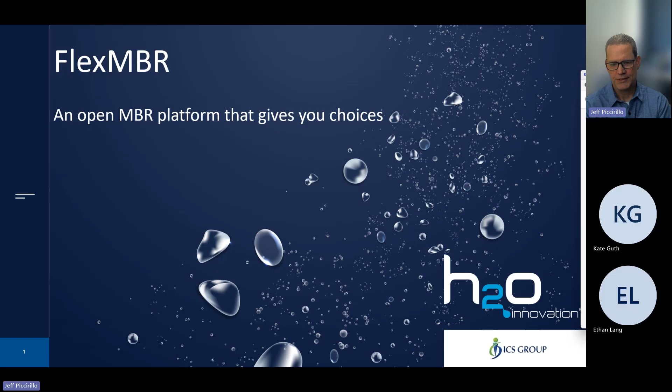It's always good to get out and share our knowledge and a little bit about H2O. The presentation I put together gives a high level overview of H2O in case you're not aware of who we are. Then it'll dive into our MBR application, FlexMBR, and finish up with a case study of a retrofit that highlights the different attributes and how you go about incorporating FlexMBR into a retrofit, a greenfield, or an expansion application.

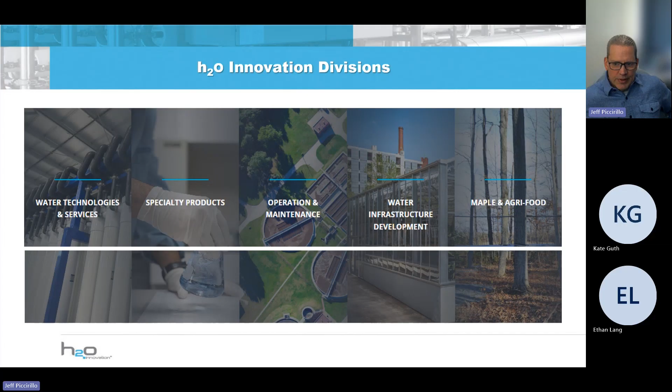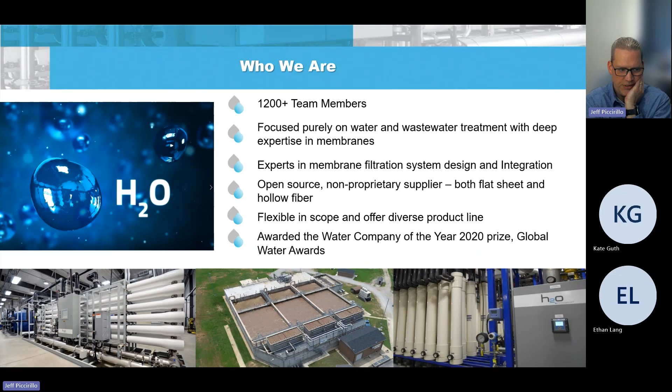At a snapshot high level, we're over 1,200 team members. We focus purely on water and wastewater treatment, that's it, and we have very deep expertise in membranes. Every single one of us in this organization has been around membranes for, I'd say, 3/4 of our careers. We engineer, manufacture, service, and operate water, wastewater, and water reuse systems. Through our expertise in membranes, we promote a flexible approach and want to provide freedom of choice to the end user, enhancing performance and reducing overall operating cost.

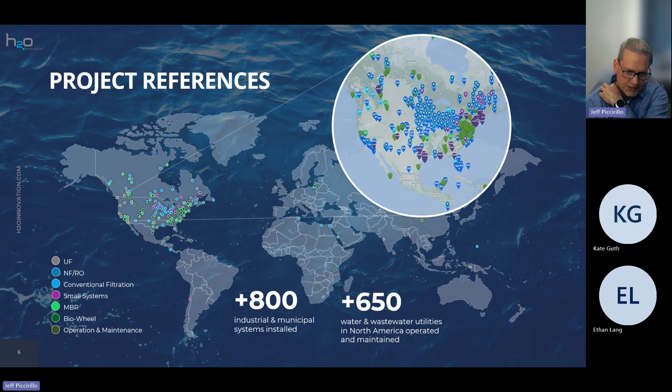In terms of projects, we're pretty broad across North America. We have over 800 industrial and municipal systems, including UF, NF, RO, MBRs, some small systems, and we operate over 650 water and wastewater utilities. We take that O&M experience and apply it into a lot of our technologies and designs as we look at water and wastewater plants.

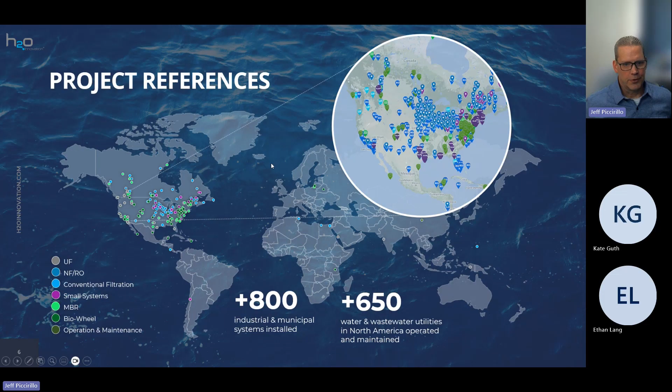We are also an OEM. We have 2 manufacturing facilities, over 100,000 square feet of manufacturing. We have a facility just outside of Minneapolis, and another facility in Quebec, so we can cover Canada and the US quite extensively. We also have chemical mixing and manufacturing in Vista, California.

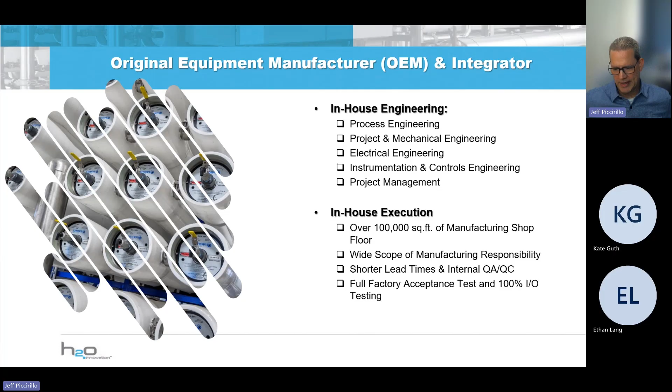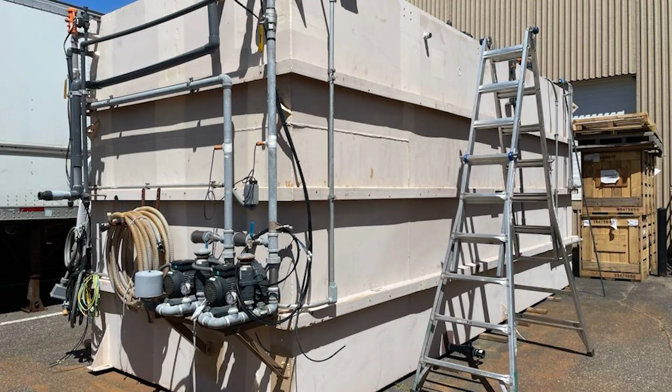And we have full-blown engineering in-house: process, project, mechanical, electrical. We do all the instrumentation and controls, plus full project management and execution. Having that in-house ability means we build all our skids from the ground up, giving us a firm basis to test and check them out before they ship to the site, which helps save time on site.

All right, so that's the overview of H2O. I sped through that, but now I'll move into the MBR portion. I wanted to start by going through the key applications we look at for MBR, which I've categorized into three categories.

First is stringent effluent limits. With MBR, you have the capability of getting exceptional water quality because it is a UF membrane in the end, it is a barrier. So when folks are looking to get BOD and TSS less than 5, trying to get nitrogen less than 10, and total phosphorus less than 0.3, MBR is a good option for that.

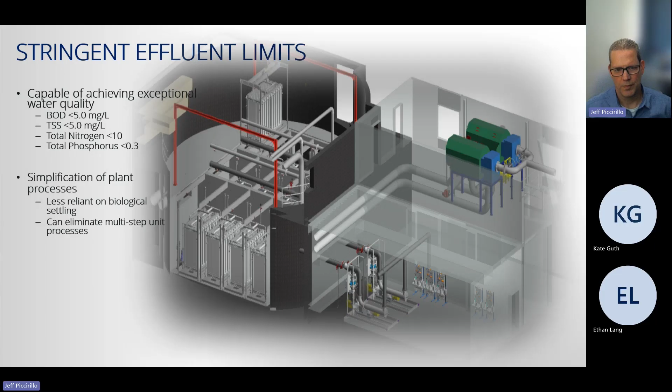Also, simplification of the plant process, so it's a little less reliant on biological settling and can eliminate a lot of those multi-steps in the unit process. You can eliminate, whether it's an additional clarifier, you may have a disc filter that's doing some polishing in the end.

There may be a slightly higher capital cost on the MBR portion, but generally you're eliminating steps in a traditional conventional wastewater plant. The other factor we look at is if a plant's looking to increase capacity. You can get a much more compact footprint with MBRs, double, maybe triple the capacity of a conventional activated sludge facility. And it's also very adaptable to retrofit into an existing treatment plant, whether you're trying to expand the plant life, extra capacity, or hit new treatment goals.

We'll touch about that in the case study. This is actually a picture of the case study we'll be touching here at the end.

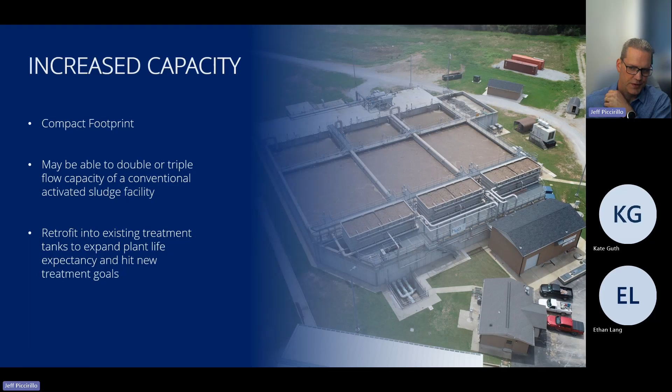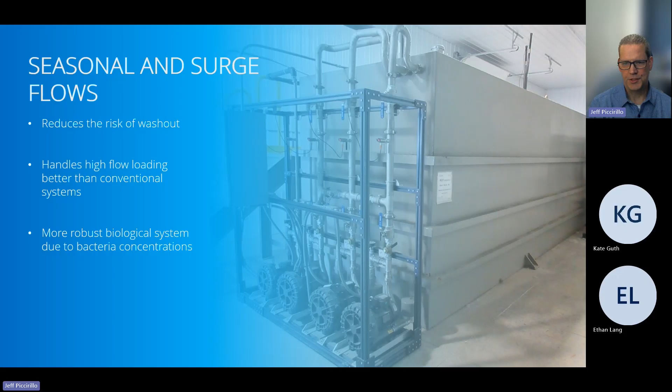When you have seasonal and variable flows, or surge flows, because MBR is a barrier, you are running at higher mixed liquor concentrations than you would with a traditional system. You're able to handle certain high flow loading better than a conventional system. Tends to be a little more robust on the biological side. You can build a portion of that equalization into your bioreactor because you are running at that higher mixed liquor concentration. And because it is a membrane, you can run temporary flux increases that handle some of those short-term surges that a plant may see, and run the flux a bit because you're able to clean them back, get them back to a condition where you can run that MBR at a nice steady state.

So we want to dive into the FlexMBR platform that we've developed our MBRs for. First, a little bit of history.

In a nutshell, MBRs have kind of gone through what we would consider 3 membrane lifetimes. When MBRs first came out, it was 3 products: Zenon, Siemens, and Kubota were the three main players. That has now since grown to over 30 different products and continues to grow as MBR took foothold and got adapted more and more within the market. And that brought obviously increased competition, technology matured, it improved, really new products that have been developed, positioned for that retrofit market, those first membrane lifetimes where those first membrane systems were installed.

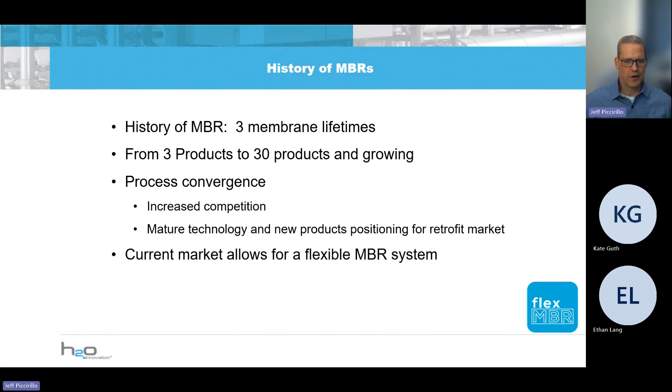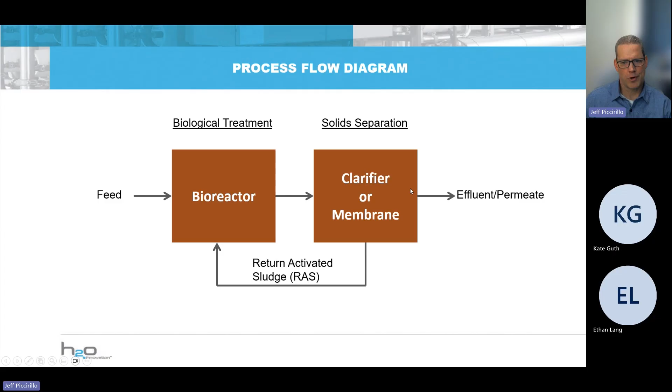So based on that, we feel the current market allows for a flexible MBR system. And to kind of talk about what we mean by that, we'll just start real basically. In a biological treatment system, you have your bioreactor, your biological treatment, and then you have your solid separation. The feed coming in, you'll have your return activated sludge, and then you have your effluent or permeate going out. So that solid separation typically is a clarifier, some sort of sedimentation, or it could be a membrane.

So from an MBR process, we're going to focus on that solid separation. The reality is you have that membrane filter you drop in within your tank, and you have your activated sludge from the bioreactor coming in, you have your return activated sludge coming out and going back to that bioreactor. And the membrane, you pull a vacuum on it, and the permeate comes out, and you're concentrating that sludge within the tank.

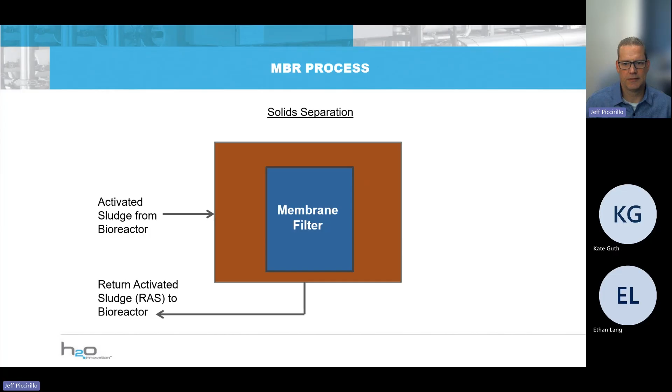So with that factor, on a membrane system, you're going to have a permeate line coming off. As I mentioned, there's a vacuum, and then you're going to have an air supply coming in. That's supplying air scour for that membrane to keep the solids from building out, impacting it to kind of an irreversible fouling or flux condition.

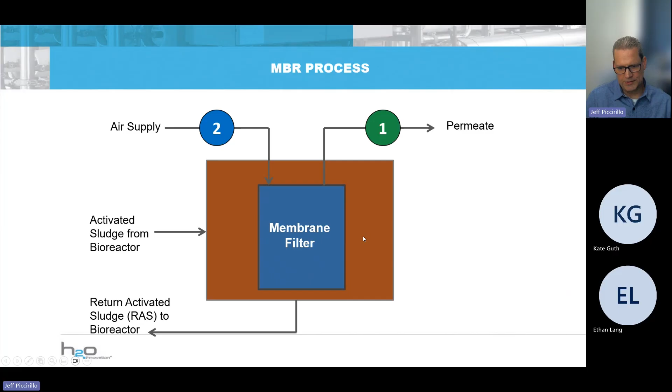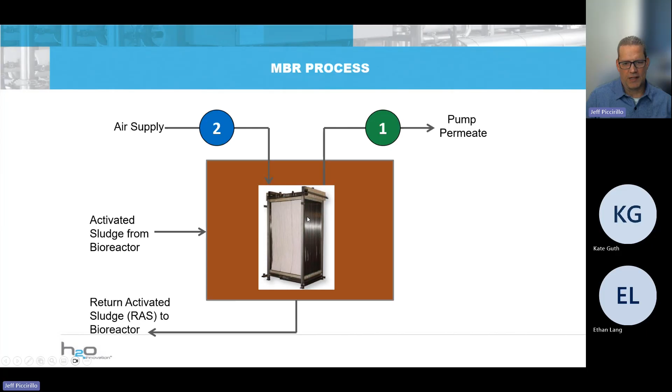And with that, really, it's that membrane filter. Traditionally, has always gone to a membrane supplier, and they design around their system, around their membrane. But the reality is, there's enough systems out there, and in our expertise, we found that really your permeate, your air supply, how they run those and set those can fall within a common band. So that allows you to maintain these conditions and provide flexibility in that pump, the air supply. That gives you that flexibility to drop in a different membrane, whether it's hollow fiber or a flat sheet.

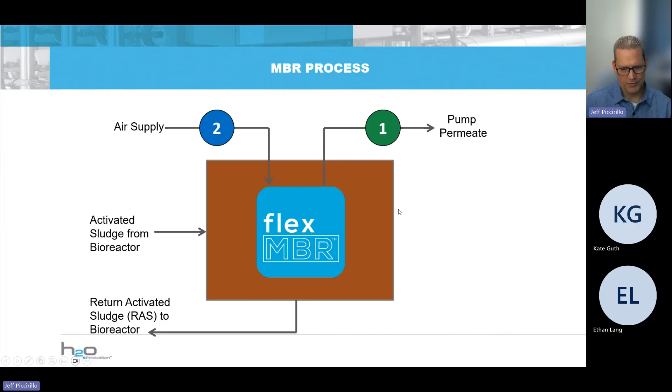Or even ceramic type applications. So that's our concept at a high level. It's simplified from what a flex MBR is. It gives you that flexibility to use a wide variety of different types of membranes.

So with that, and this whole product convergence of a wide variety of manufacturers, when we're looking at a flex MBR design, really the considerations we're looking at are the air scour rate, the mixed liquor concentration, what kind of process sequence is coming in, and then obviously there's module dimensions. Every module's got a little bit different dimensions, and how do you make that fit in so you can adapt to keep that flexibility?

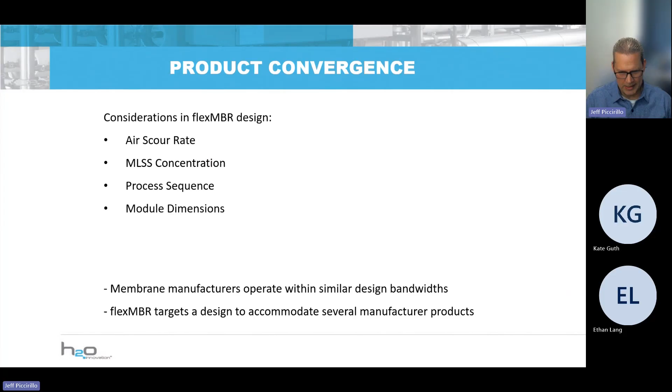What we found out is that membrane manufacturers operate within similar bandwidths. Because of that, we can target, design, and accommodate several different manufacturers through our experience and knowledge, and that really comes into the heartbeat and programming of our systems. If you look at air scour, for instance, we can find a band where we can get the aeration module sized, size a blower for that, add a VFD, and provide the programming and knowledge behind that to accommodate a wide variety of different manufacturers.

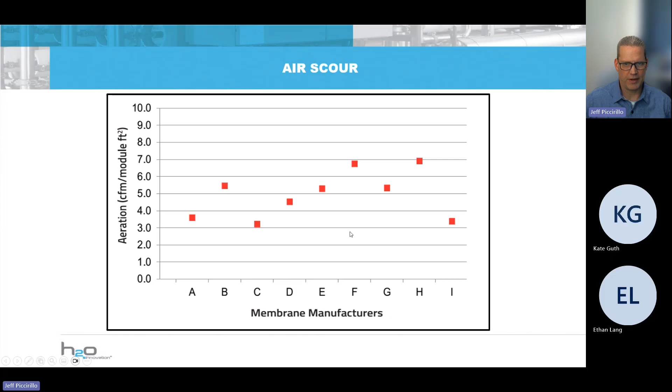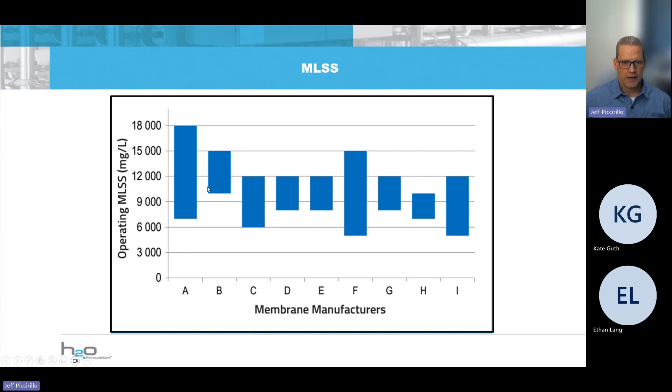Same thing in the mixed liquor. Generally, you can see from this that your bandwidth is going to be somewhere between 7,000 and 12,000 milligrams per liter in the mixed liquor concentration. So that gives us kind of an overall scope that we can target.

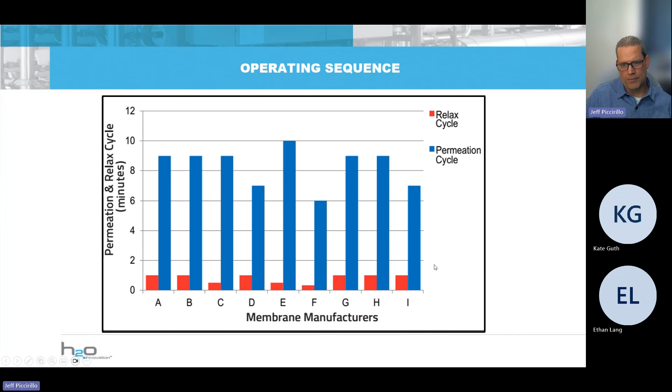And same thing on operating sequences. In the MBR, there is a permeation and a relax cycle. Typically, folks are permeating anywhere around that 6 to 10 minute time frame. With the relax cycle, it's pretty standard, either 30 seconds to 1 minute. So taking that knowledge of where that optimal operating band is allows us to really build an MBR platform that we feel can be flexible and adaptable to a wide variety of different membranes.

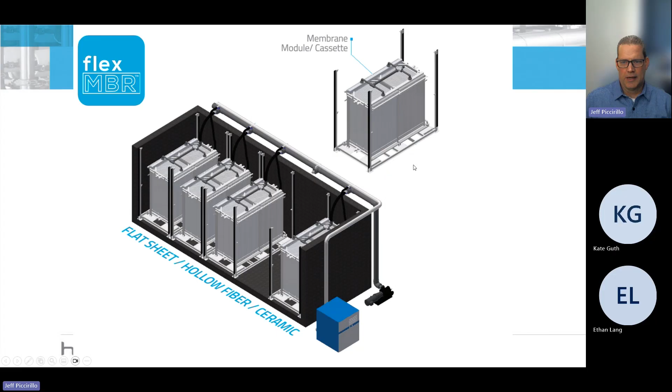So really our platform starts with a membrane module cassette. They come in different sizes. So with that, we developed a universal module support platform where we can drop different types of membrane modules within a system, within that platform.

And then the other key part of it is a flexible control system. We've taken all that knowledge from our years of experience and put that into our program, and allow us to adapt and change settings within the program to accommodate different membrane manufacturers. And we don't lock that program. We feel we have that open source concept, so our programs are open. You don't need a special code. We provide that to our end users so that adjustments can be made and programming details can fall within their individual controls teams as well.

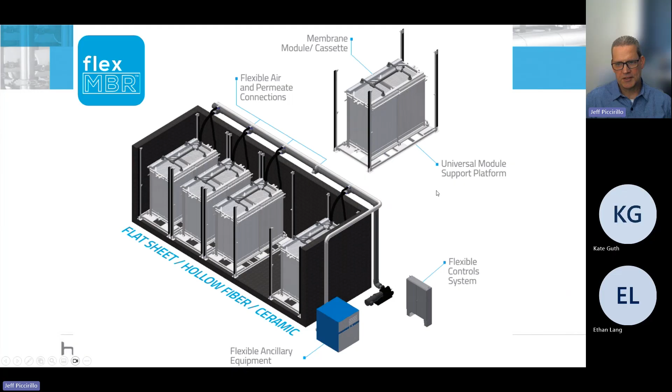And then we're pretty flexible on ancillary equipment. A lot of times we'll provide those blowers, we'll size them if they've got particular vendors they want to use. Generally we can accommodate, but we like to go through that selection process and select that just so we know it's going to fit within our control and our FlexMBR platform. And then there's flexible air and permeate connections to the tank that allow us to accommodate the different membranes.

So really, our FlexMBR platform is an open source design from the controls on up to the equipment, where we want to have flexibility to select the membrane, flexibility to change the membrane down the road for whatever reason it is. There is a lifetime of membrane, so you want to be in a competitive situation - that certainly helps get the best price for the end user. And then as we mentioned, it's always evolving, so there are newer technologies coming up all the time. This allows you the ability in the future to be able to accommodate that and use multiple products.

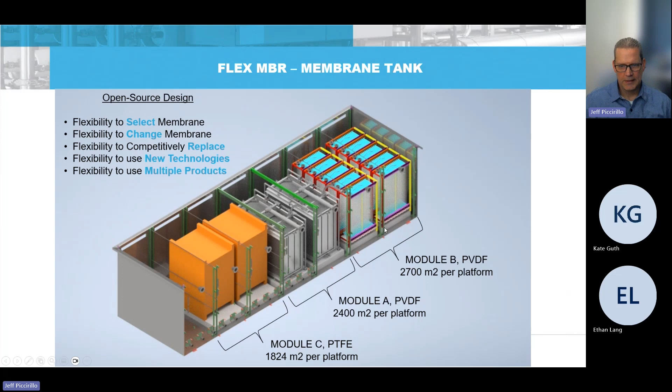I mean, here's a perfect example - you can have multiple different modules within parallel trains in the FlexMBR platform. Always like visuals, so this is actually a visual from our pilot, and you can see we've got two different membranes side by side. We've got a Hydranautics and a Toray in one, and then a Sumitomo hollow fiber, and then a Meidensha flat sheet.

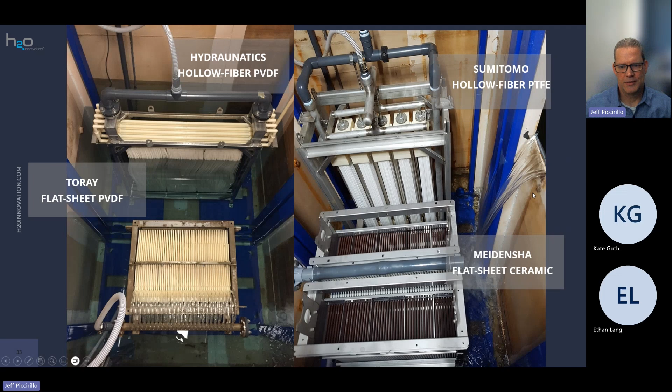Our pilot does accommodate up to three different membranes if folks want to test, validate, or optimize a membrane in that selection process.

All right, so I wanted to go through a case study. It's a plant we did in 2019 in Decatur, Arkansas. It was an existing SBR.

They had a couple things they needed to accomplish. One of the big ones is they needed to increase influent flows as they had increasing demands, not only from the community, but also industrial flows from a chicken processing plant that were increasing as well. So they needed to be able to double their capacity. The other neat caveat is because it's an operating plant for the community, they had to retrofit without taking it offline. They needed to process the sewage coming into the community, and then maintaining the same footprint was a key factor, as well as being limited on space.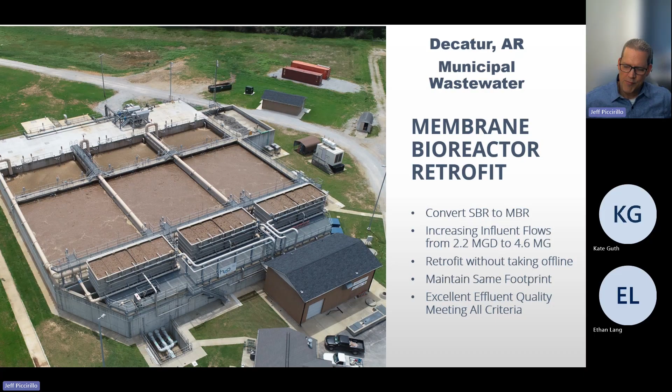Yeah, there is some green space, but that's in the surrounding area. You can see in this picture here, but it's more for being able to have other future expansions outside of this core footprint. And then obviously they needed to meet effluent criteria as they were discharging to, I think it was a small river or creek, I can't remember, but they needed to have good effluent quality.

So with that, we bid against outside competitors. It was a competitive bid with GE, Ovivo, Fibracast, and Evoqua as the other bidders. We ended up being low cost, but we also proposed an innovative solution, kind of out-of-the-box thinking of how to maintain within that same footprint and not have to add a new building or additional structures to the side of the plant. And I'll talk about how we did that.

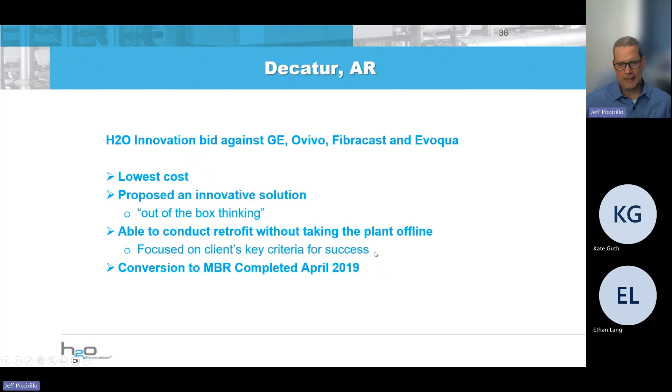And then how we were able to conduct a retrofit without taking the plant offline entirely, being able to maintain flow through a couple trains. So these were the key criteria in our selection for this. I'm going to go through a little bit of that project here. It's going to be lots of pictures and details. Feel free to cut in whenever you'd like.

So we had a pre-existing 2.2 MGD SBR plant, essentially 3 trains of SBRs. You've got your wasting over here. This essentially is your EQ, and they had a post-EQ over here. And then what you can't see is their filtrate, oh it's over here, I think it's a filtration building as well.

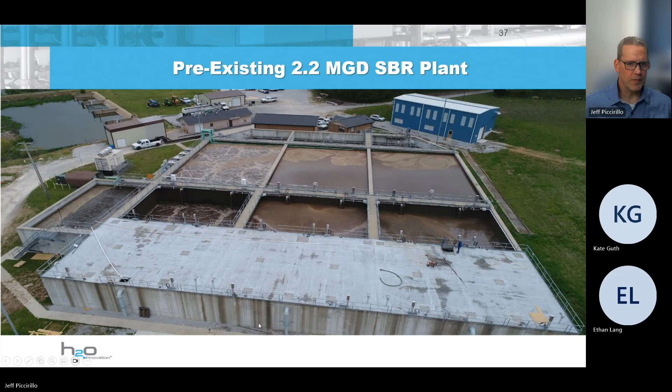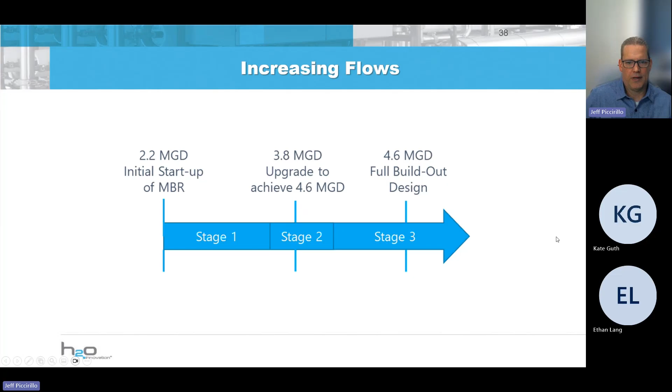So the intent was we need to increase the flows. There were 3 stages we went through to accomplish this. Initial startup was for 2.2 MGD, and we did this essentially by commissioning. We had 1 MBR train and 1 SBR train operating during stage 1, while we took the second train off the SBR and did work inside that tank to accommodate it. Stage 2 was essentially getting that second MBR train going. And then stage 3 is we had all 3 MBR trains going through to get that 4.6 MGD build out.

As I mentioned, there was some high strength waste from the chicken processing plant that gave us increased COD in there, in the 400 to 600 range. Some TKN and ammonia was also elevated compared to traditional straight sanitary sewage as well.

And then these are the effluent parameters that we had to meet. We had to get less than 10 in the BOD, less than 15 in TSS, TKN and ammonia down to less than 1.6, obviously nitrates less than 10, and then they had a total phosphorus limit of less than 0.1. All perfectly suitable and adaptable to MBR, with that barrier providing a lot of that security to get these effluent criteria.

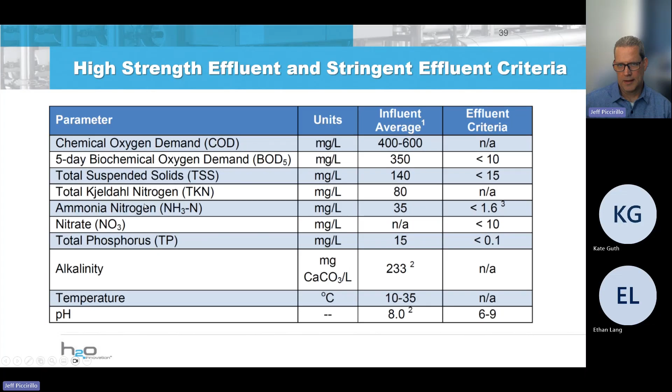So from a retrofit standpoint, 3 real key things: we needed to meet the design requirements, we had to provide an economic approach, and we absolutely had to allow the plant to keep operating, which proved to be a challenge, but it was a fun challenge, and that's what makes this particular case study and project a good one to talk about.

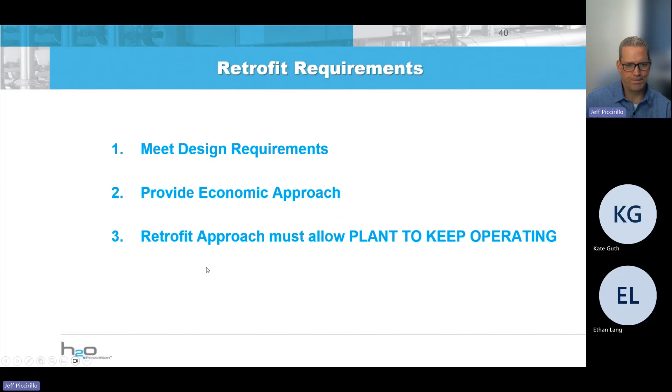So essentially, as I mentioned, we had a pre-existing plant.

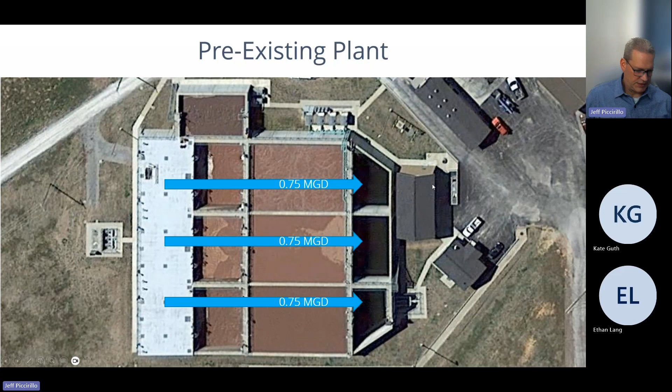Each train was 3/4 of an MGD, going from EQ through our basins to the SBRs, and then we had a post EQ as well. They did have disc filters within this building to do final polishing before it went out to the environment.

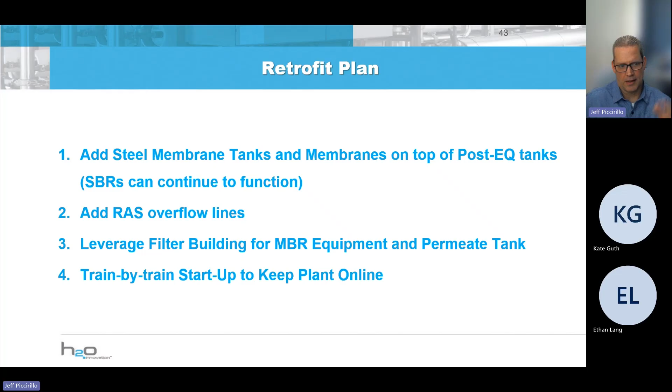Overall, the retrofit plan was we needed to add steel membrane tanks and membranes on top of the post EQ. So that was us thinking outside of the box. We proposed having elevated MBR tanks, which allowed us to use gravity flow rather than relying on permeate pumps all the time. It also allowed us to keep that plant operating while installing the RAS overflow lines. We leveraged the filter building for the MBR equipment and permeate tank, locating them there, and did a train by train startup to keep the plant online. So at a high level, those are the 4 key steps within this retrofit.

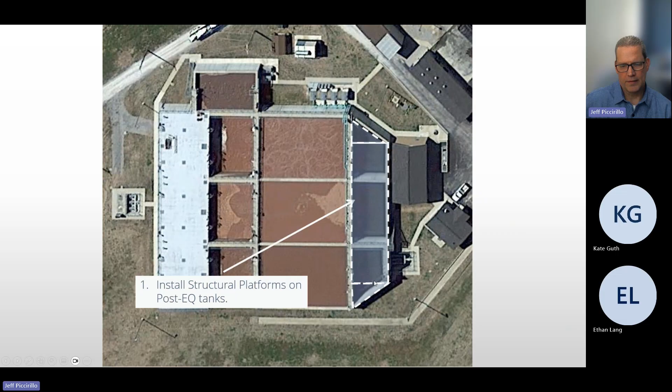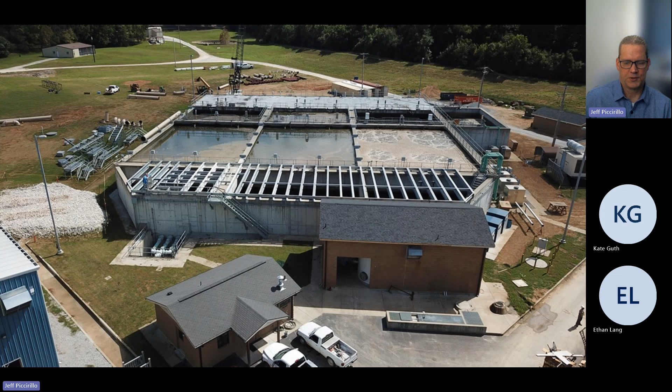The first step was to install structural platforms across that post EQ. This is where we were going to locate the individual membrane tanks for the 3 trains, and the plant was still operating. We started installing that structure and the girders to support the membrane tanks. The membrane tanks were manufactured within our facility outside of Minneapolis, with everything done, tested, fit up, and constructed there before bringing it to the site.

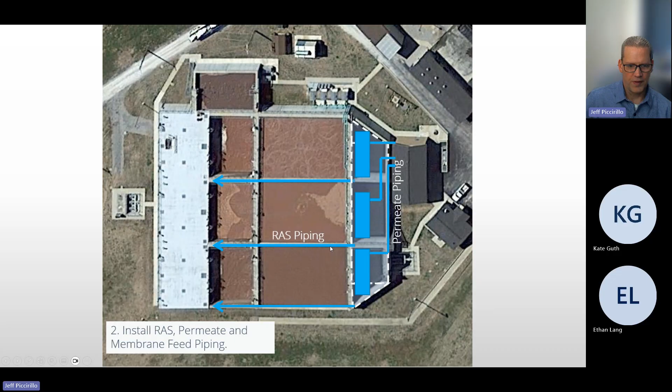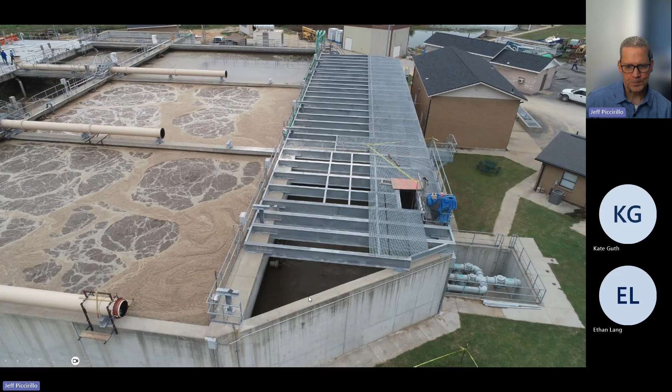After that platform was done, we went through and installed both the RAS piping and the permeate piping within the facility. Here's the platform with the RAS piping being installed, and the plant was still operating at this time. This is what it looked like when it was completed and all installed and in place.

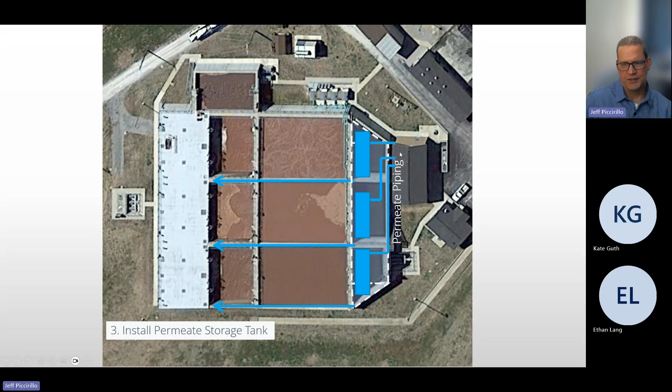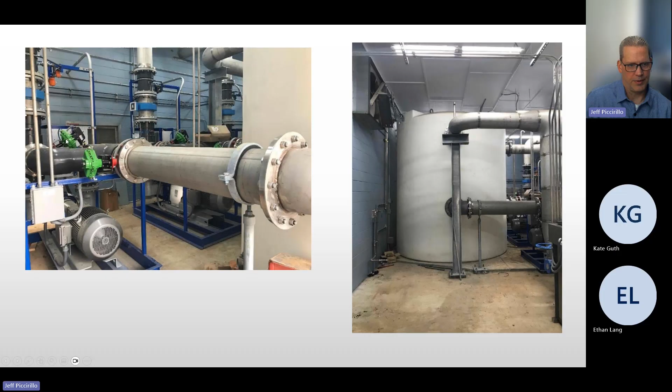Then we needed to install the permeate storage tank and the permeate pumps within the building. It was a pretty tight fit, but we were able to manage it. We got that permeate storage tank and our permeate pumps within this building. Everything was pre-skidded, pre-wired; we just dropped it in and tied the connections into the junction boxes and the piping. You can see where the plastic piping was added, along with the valving, including the flow meters and some of those ancillaries we provided as well.

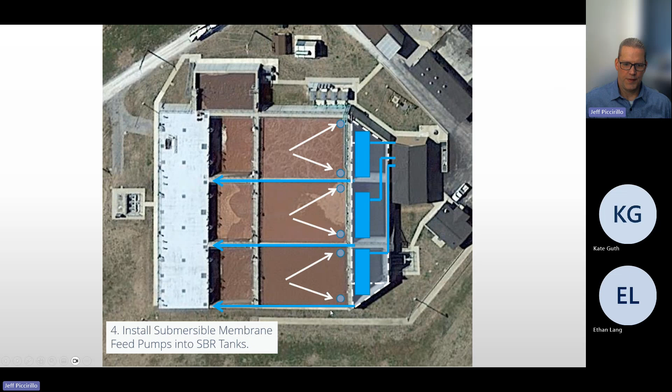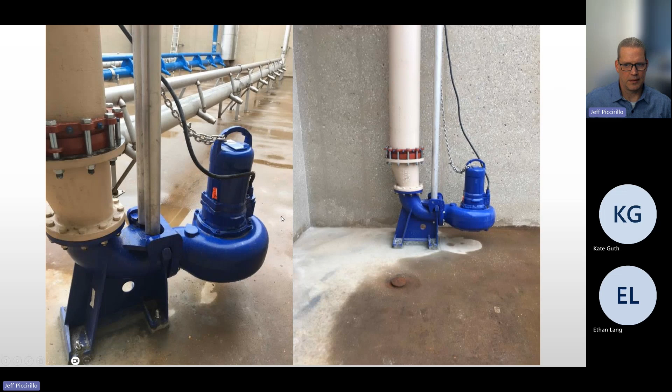Once that was installed, the next step was to install submersible feed pumps to the SBR tanks, with 2 located in each tank. Here's a picture of those feed pumps installed while one of the tanks was down. Worth noting, as we went through our calculations, because we have a higher concentration of mixed liquor, we had to add an additional aeration header. There were 2 initially, and we added a 3rd to maintain the appropriate aeration needed for the aerated anoxic process that feeds into the MBRs.

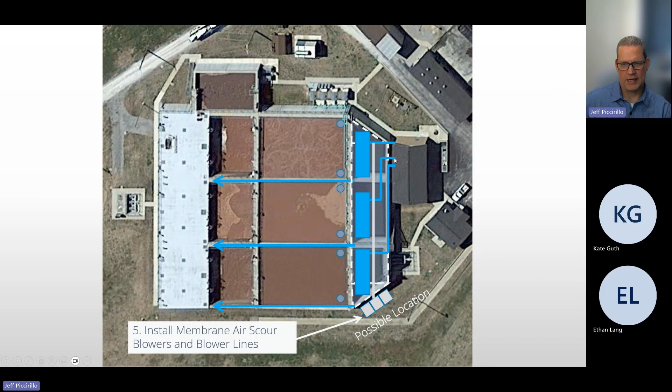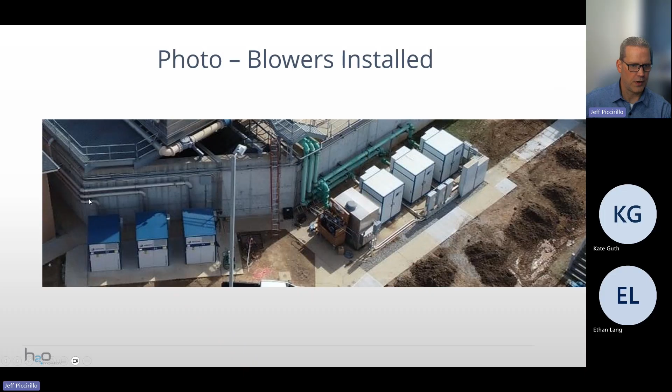The next step was to install those membrane air scour lines from the blowers. These were existing blowers for the SBRs initially, but we ended up relocating the blowers to accommodate those lines, with similar run lines. It was also closer to the power sources and the filter building. These are the Erickson blowers we installed for the air scour, along with all the lines ready to go for the final connections.

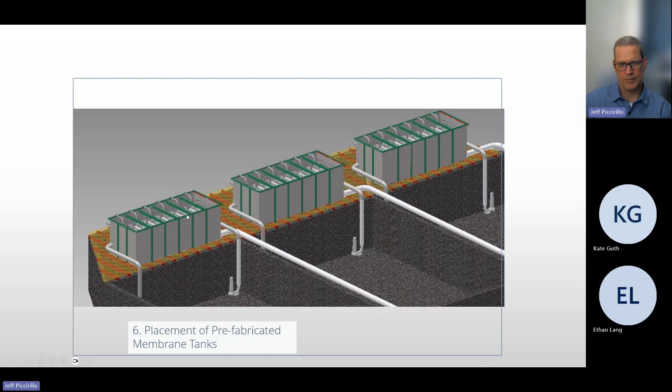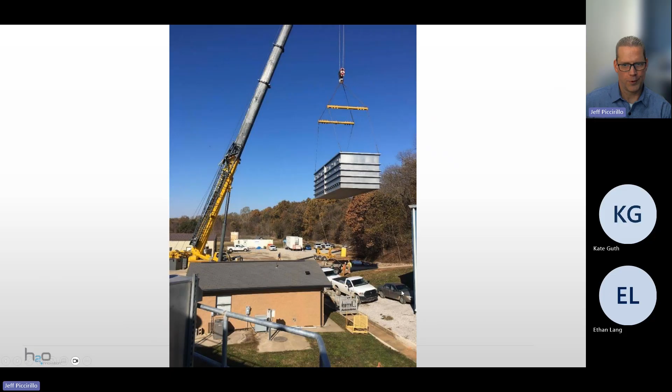The next step was to place the prefabricated membrane tanks. These were designed by us and fabricated in our Minneapolis manufacturing facility, with the intent of being able to crane them and drop them right in. Here's the installation, pulling one of those tanks to be dropped onto the platform. You can see the lines, and we shipped the headers, the permeate and air scour headers, also from our shop. We shipped those loose and attached them once the membrane tanks were put in place. That's the attachment of the prefabricated permeate headers, everything fitted up in our shop, decoupled, and then shipped to site.

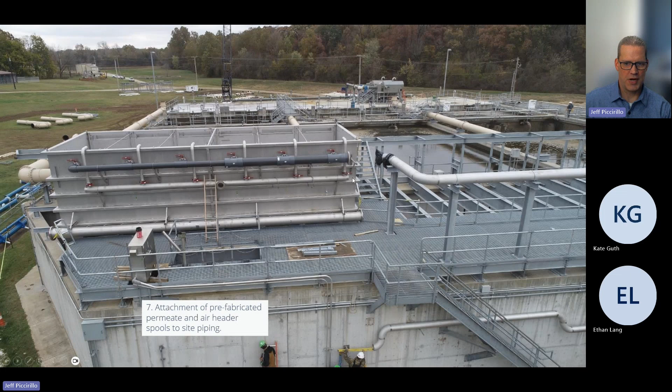Once we dropped one in, we added those permeate and air headers onto the system. Then, once everything was connected from a piping perspective, the next step was to start converting these trains to MBR in sequence. We did one train at a time while maintaining operation of at least one SBR train to keep the needed flow. As seen earlier, the initial stage was 2.2 MGD, so we maintained the initial flow plus a little bit more, increasing it with each MBR train brought online.

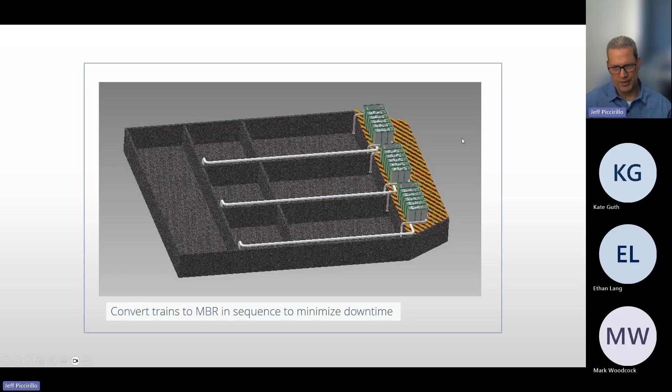And you can see overall we did that. So here we've got the one tank down. As I mentioned, we dropped those two submersible feed pumps. We also added a third aeration header into the tank.

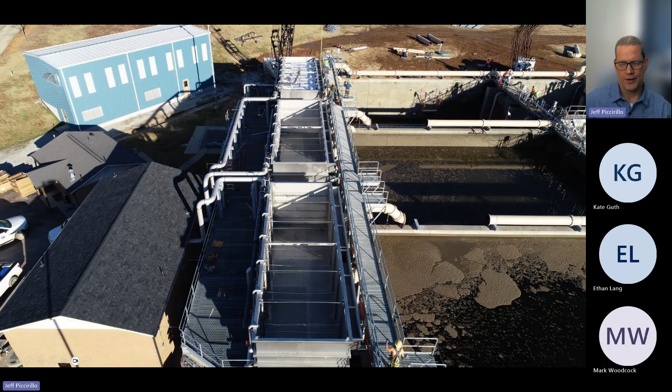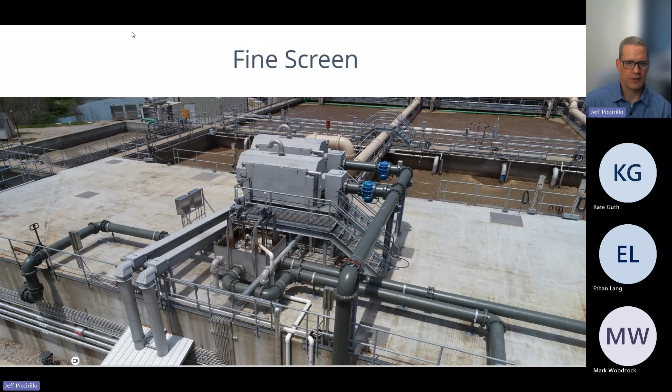And then we also had to provide the fine screens with the MBR. We need at least a 2mm screen. So we added those, sized those, and provided those in order to get that in before it drops into EQ. That was the other step I mentioned earlier, but was added.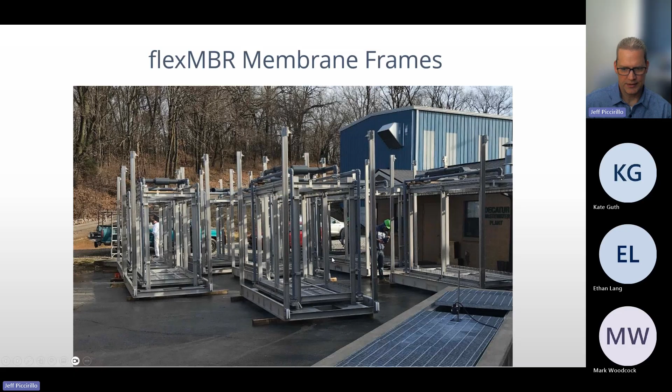So all the frames were brought to site, membranes were shipped, and we did this one train at a time. So we installed the membranes, raised them, and dropped them into that first tank.

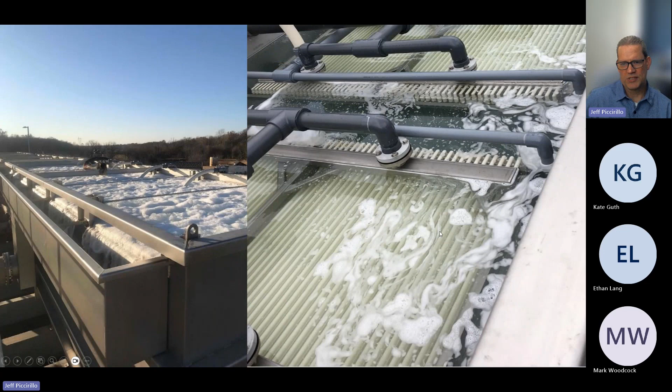Once they were installed, we went through and obviously wet with clean water, processed it, and made sure everything's functioning and checks out. We're good to go. Once it was functioning and got the okay from a commissioning standpoint on the clean water, we introduced wastewater into that first train to get it going, get it optimized, fully commissioned and running.

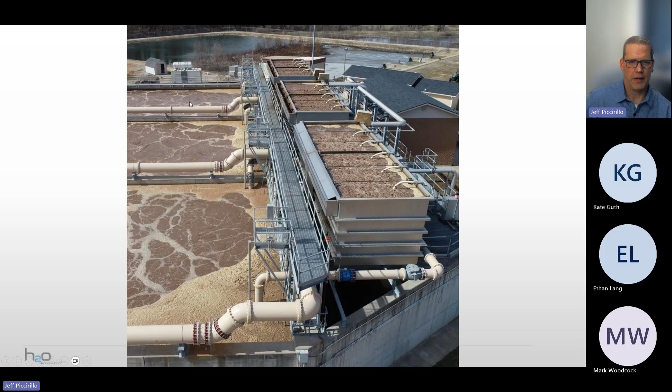And at stage one, we got that 2.2 MGD. We brought on the second train to get 3.8 MGD while still operating one SBR. Once we had these two trains going, that gave us 3.8 MGD. We were able to take down that final SBR tank, empty it, install those two submersible feed pumps, install the third SBR air header, and then get that one going to get a full functioning 4.6 MGD plant in the end.

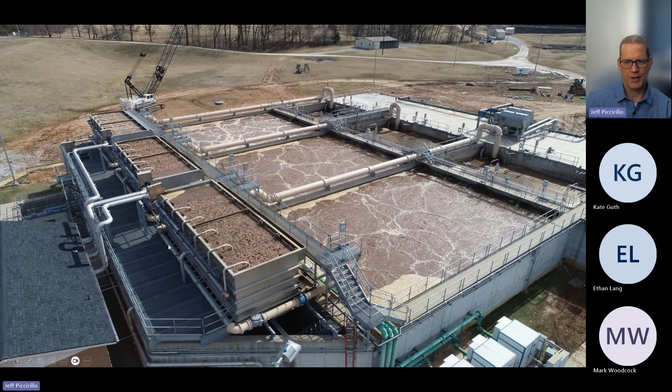So that is kind of the pictorial snapshot history of how that retrofit took place while maintaining operation of the SBR plant and feed into the facility.

So that conversion, as I mentioned, was completed in April 2019 - exactly 6 years, almost to the day. Plant flow rates increased from 2.2 to 4.6 MGD, and we did it within the same footprint. In the end, we're producing excellent effluent quality: BOD and TSS non-detect, nitrate less than 5, and phosphorus less than 0.5 mg/L. So we hit all those criteria, and to this day, the plant is still operating in that nature.

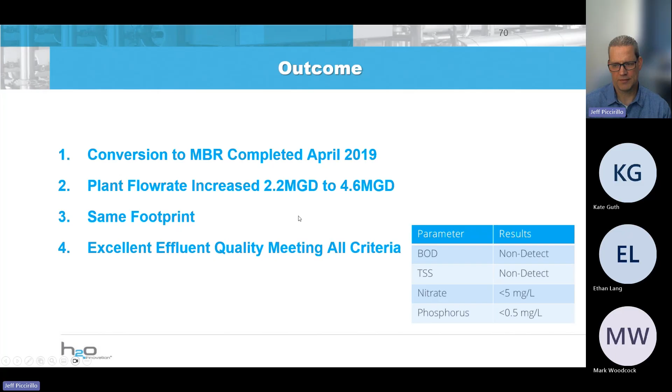Actually, we're going through another upgrade or retrofit at the facility. We're using membranes to thicken that sludge a little bit to accommodate the capacity within that waste tank, so it can handle more solids. They're having to continually process it a little bit quicker, but by thickening that tank using membranes, we're giving them some additional capacity within that footprint.

And then a key thing, one of the big things I didn't mention, was the controls. They had no overall SCADA or trending within this plant.

We programmed and installed our Intelogx SCADA system, where we've given them full trending on any of their water analysis. All their water analysis gets fed into here, so we can provide trending on that plant. They can maintain each train on a train-by-train basis. This was all part of the overall design, incorporating all those features and parameters to accommodate the different conditions.

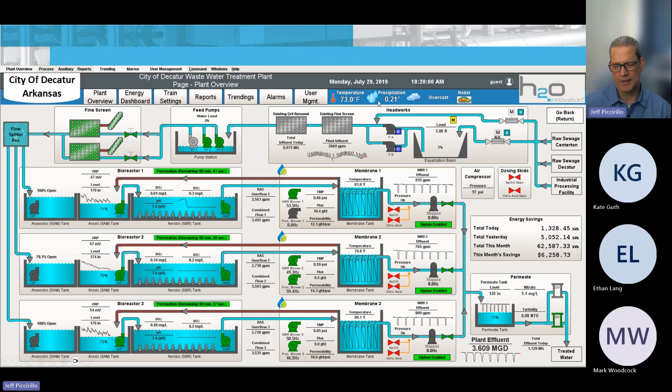And this platform will allow them, if for some reason they want to switch to a different membrane in the future, to do that with this program and accommodate those changes on the permeate pumps, the blowers, and a lot of those set points that we've pre-programmed and put in the background for them to accommodate that.

And that's it. That's a little bit about the FlexMBR - that's the case study at Decatur. I hope that gave you an idea of what can be done, a little history around the FlexMBR, but I'm open to any questions at this time.